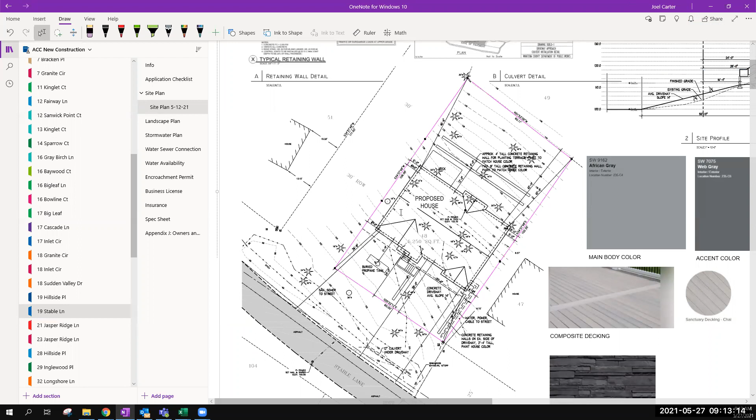One of the bigger issues here is the driveway slope again, and I think there's a preemptive variance put in for the driveway. We have kind of the same issue here that we talked about with last week's 38 Valley Crest. The driveway was too steep initially, so we asked him to take it down, and now he's at 14%, which is the maximum slope.

At this point, last week we said he could go to 16% and add some steps, and that would be his variance. Since then, I took a look, and the 16% only gives him 1.5 feet. So I don't know.

Is this something that- with the current plan, though, we have, it's meeting the requirements, all right? Can we go forward with the current plan, or do we need to... I'm not into the preemptive variance thing. As far as I'm concerned, the plan does meet their requirements. We'll have to hold them to it if it does get built and if the driveway is steeper.

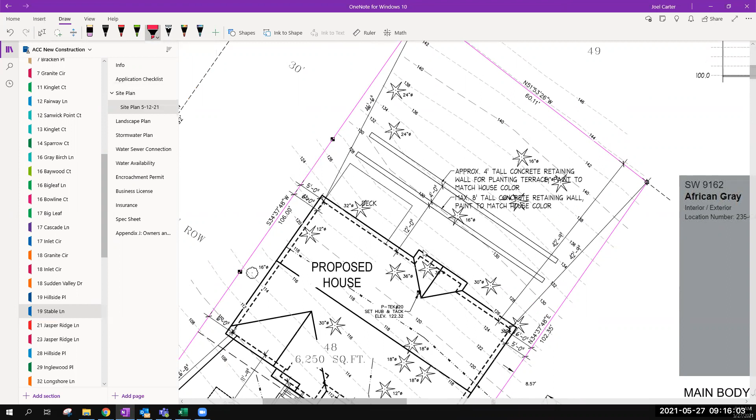And it would help out the foundation so that the right-hand corner is a little bit above. So I did the calculation: for a 17% slope, that would put the slab height at... sorry, wrong one. So it would put the slab height at 115.75, and the top of the wall in the back at 125.

The trees that are being proposed already to be removed are the 24-inch ones, these two here. And I was going to take the tree down but leave the stumps in so we don't disturb the trees behind it, so that when we start digging for the retaining wall... because the trees are leaning pretty bad towards the road.

So I was worried when I dig that out, it might fall over and then maybe cause the ones behind them to get disrupted. Yeah, those, I think, I agree, those should be removed, they're too close to the work. And I'll keep the stumps there so I don't have to dig a hole and possibly disturb the 24-inch behind it, and the 16, and whatever, the 3 in the back, the very back.

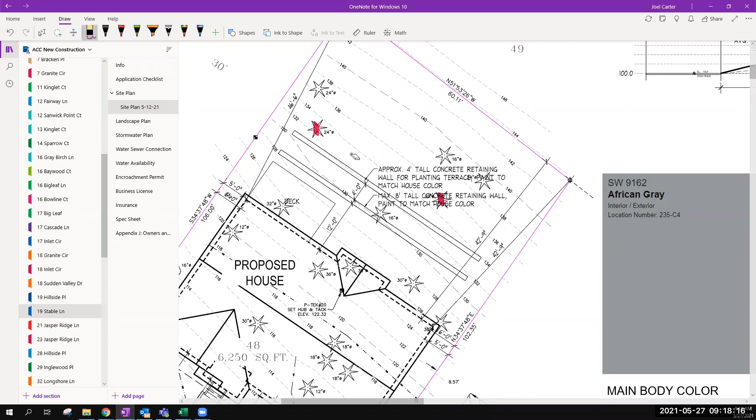Okay, so these trees in red are already proposed to be removed on the stormwater plan site. I don't see an issue there. That's with the current plan meeting all our requirements, all right? Is he proposing to change from the average 14% on the driveway to 17 then?

I requested 18, and I was hoping, because this lot is much steeper, and building that 4-foot retaining wall in the back, I don't know how we'd backfill it. I don't want to disturb the trees that are outside my property line. I'd have to get a big machine back there to backfill that 4-foot retaining wall, so I'd have to drive on the easement area on the left side, which is the Sudden Valley right-of-way, or on the other side, which is the neighbor's side. I don't think they would appreciate that.

Well, if you're just talking about backfill, you wouldn't need a big machine. A better type of retaining wall, if it's only 4 feet, is a block wall or a rockery, where you don't have to put in a whole footing. It's much less disturbing, but that 8 to 10 foot retaining wall there would have to get poured.

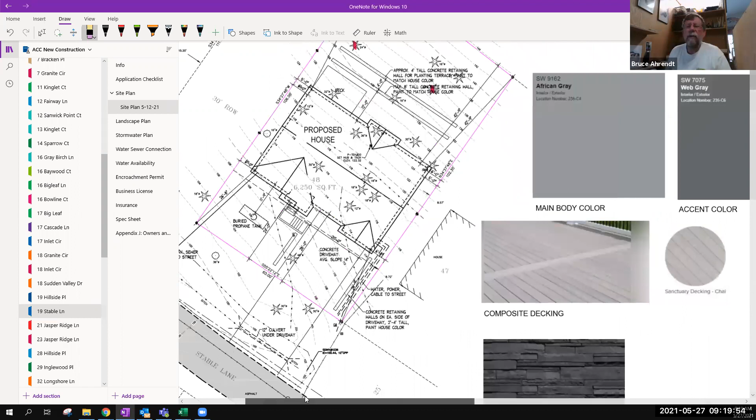Okay, I'm having a little trouble following what we're doing. We've got a set of plans right now that's being presented that meets our requirements, and now we're discussing changing it to something that doesn't. Well, the architect didn't have time to change it, and said after we decide on what the driveway slope will be, he'll correct all these comments Karen gave us, and he wasn't able to get it in before today's meeting.

So it's the same thing as last time for 38 Valley Crest Way. I requested a variance just in case we hit hard rock, and after looking at this more, I think we need a couple more degrees. Even though it doesn't give us more, it really helps us out in the back. And these retaining walls, there's so many of them, and once we pour the U-shaped retaining wall, we won't be able to get the machine back behind the house.

Well, I think you'd want to do the retaining wall while you're excavating for the house, so you can put your equipment in the footprint of the house to do the work behind it. It's the only way I see equipment working there, going from inside the house excavation and working that way. There's no way you're going to put equipment up on that slope above, and you don't have room for it on either side.

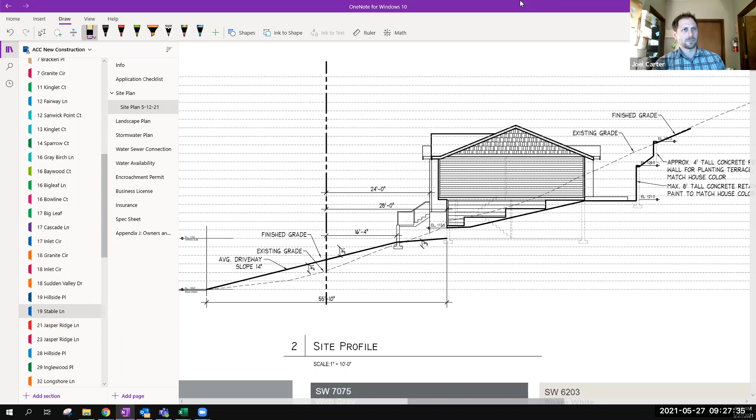Yeah, I can go with what's been submitted here, but if there are changes in the works that are going to increase that slope, we've already done this once. When do we say enough's enough?

Well, this is a variance form, right, that you guys provide? Your drawings have to match the rules. Variance is not an automatic request. The plan should come in and match the rules.

We got these notes like 2 days before the meeting. The architect's 3 weeks out, he didn't have time to change it. He said to figure out what the final slope is going to be and he'll send the final prints, since we've already gone back and forth so many times. And then I went to ask you yesterday.

So the current plans show the garage slab elevation at 114.5, is it? The garage slab is 112. Actually, you can go to 114, I thought, while meeting all the requirements. I did a calculation.

At 25%, 114.5 is what I calculated. Now, you don't need the drain swale at the bottom, which you're not showing anyway, if you just put a strip drain. So I think you can put the garage slab at 114.5 and still meet our 25% max.

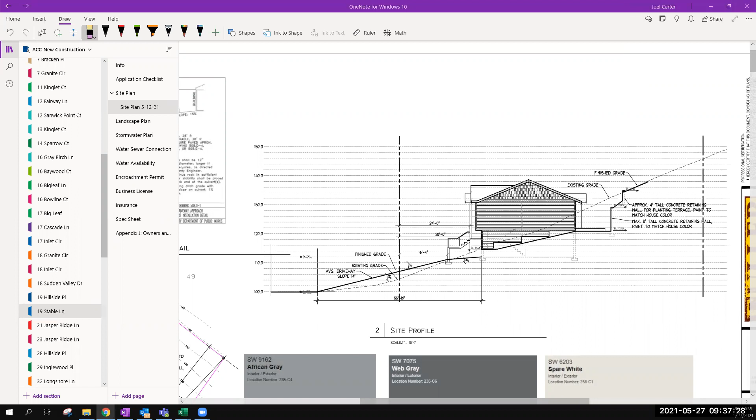You know, showing the stormwater again, the landscaping, the full schedule of proposed plantings, number and spacing of species. Part of that, I think, the landscaping plan comes from, part of it is designed by the stormwater, taking into account how much native planting and landscaping there will be. They do have species in the plant legend, but they need to show, for within the clearing limits, which plants where and how many, how far apart, especially for the sprinkle-throughout type plants like the ground covers.

They're only showing certain areas with landscaping, but the native plants have to be everywhere where they're digging up, within the clearing limits, except for the allowance the designer gives them, which I agree, those are ridiculously small, it seems to me, but that's what the designer says.

148 square feet of landscaping for this one. So everything else should be put back with native plants, I guess.

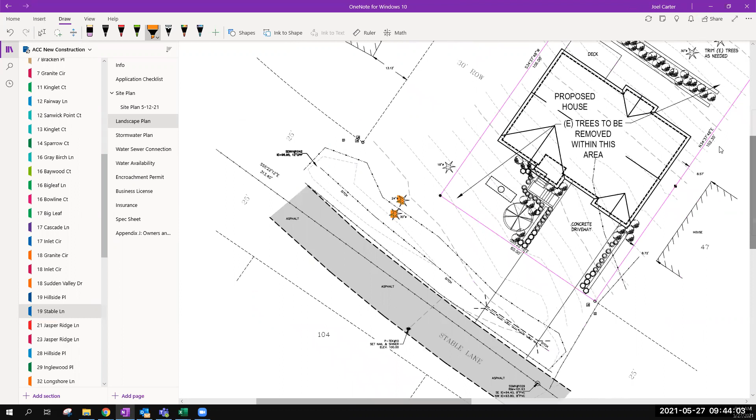Yeah, so these two trees here, I think, are going to need to be removed for our sewer connection. They were originally not on the stormwater, sorry, the tree canopy plan marked for removal.

So we went and rolled out where the estimated sewer T was, and it's right about somewhere in front of these trees. I've got a photo of it.

Yeah, so I think it's more to the left. I think you have these two trees.

I requested all four because I'll probably be in the drip line of all four, plus the temporary parking there. If you guys are concerned about roots suffocating, that's an alder right there, that 36-inch. They have a shallow root base, and they tend to fall the most, so I'd be really concerned about the alder there.

Yeah, you have to go to where the T is, they don't let you play otherwise. So I have no problem with those coming out. If you're going to take out two trees in a grouping, just as soon see them all come out.

The ditch looks like, on that picture, something that should play into creating a temporary parking spot. That looks like it shouldn't be a problem. Joel, your opinion? I don't think so, as long as it's cleaned up and revegetated. And we'll be inspecting for this.

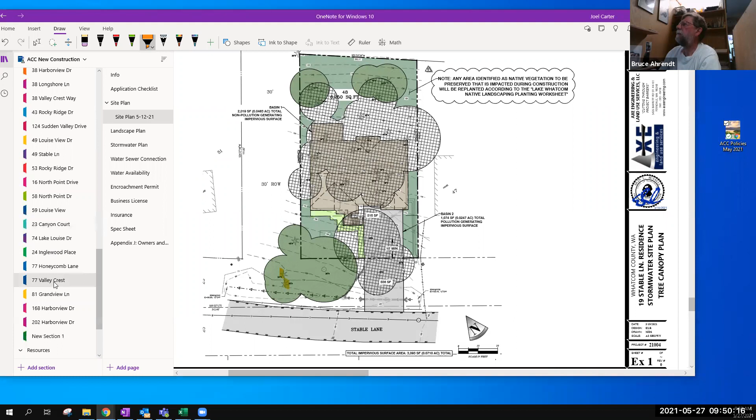We are looking at 77. So you want to start with 77 Valley Crest? Yeah, do 77 Valley Crest. So we're on a different builder here, this is Arrow Construction. Got a long home.

And I think it was, let me check. It was requested—do we have the builder and the architect here? It doesn't look like it. I don't see any other attendees in the meeting. I recommended they be here today, and the architect asked if they could join, and I said sure, it's publicly available. I can send them the link. It doesn't look like anyone's here right now.

I did send some comments last minute yesterday, and I got a chance to look at those. A lot of small issues on this one again, and when I sat down with the builder, it's a little frustrating to me that these builders are coming in with plans where they're not reading the ACC policies.

This house, as we go through the plans, there's several variances that were originally requested, but I think they've shifted the house a little bit to fit inside the setback lines. Let's take a look here. So our original plan set had an extension—we have a 20-foot setback on either side of the lot, the front and the side yard.

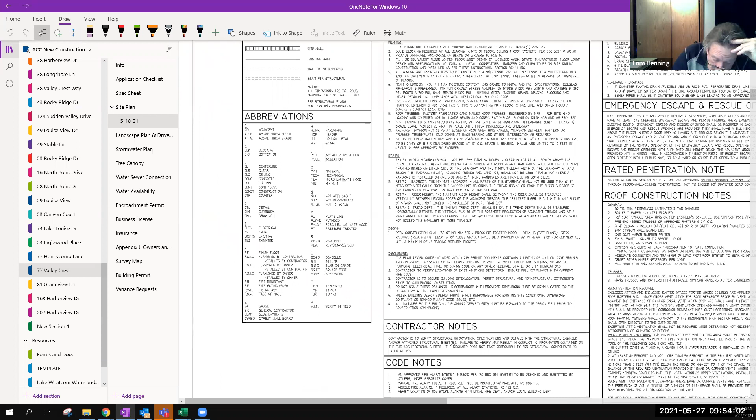So at that point he would have a 20-foot max, and I'm not sure what it says. Oh, so for the height requirement on this one, let's see. For the definition, we're within it—we're at 16 feet 7 inches. And where are you reading this? I've looked through his elevations and I don't see any place showing the height to finished grade. I know, and this is something I've asked them to put on future builds, to show that dimension on their plans. This is a measurement I put up on the drafting table, measuring with engineering rulers. I think this one actually did show it.

Can you go to the site profile, Joel? Where is that—the site profile? A1.1, sheet A1.1 at the top. Should be on all the elevations. There it is, they did put it in. Okay, yeah, it's there but it's not readable. You have to zoom in. Let me pop into this focus here—just a moment. There we go. There, oh that's better. Okay, 16.7. Mhm, that's better.

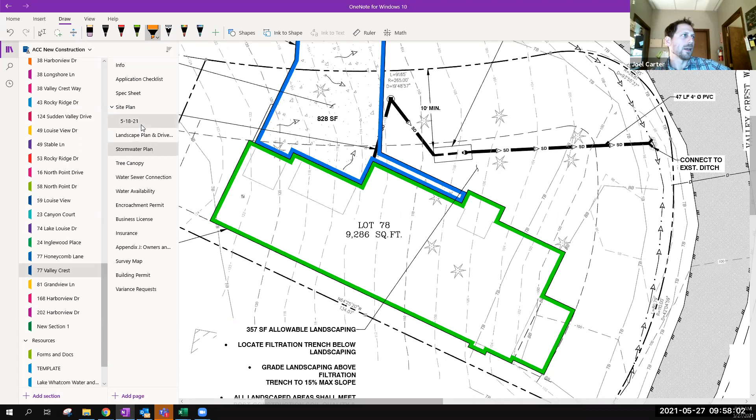Let me find... I wonder why they can't move this treatment system downhill. I don't know. But it should be out of the root zones of the trees that are remaining, because we have our new inspection schedule where we're going to put up the tree protection fencing, and then they're not allowed to do anything in that area.

Let's see, I'm pulling up comments, I want to address some of your comments now. So yeah, same comment about the landscaping plan. They really shouldn't need to show plants in areas they're not disturbing, but they do need to show them within the clearing limits. For this one, they didn't show the clearing limits in the front yard. The clearing limit line on the site plan just sort of ended in the middle of nowhere, and it should come all the way around the house and avoid those tree root zones.

I'm going to follow up with them and make sure they attempt to divert that stormwater to the north, because I don't think they have any of those trees proposed to be removed, but they're going to be cutting all the roots.

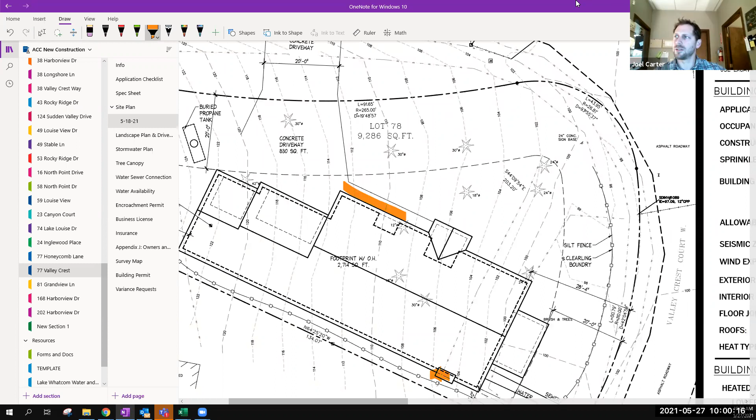Was that your comment about the sudden increase? Well, that's the comment about needing a retaining wall along the driveway, but also in their front elevation on sheet A3.0 — see that weird vertical line right here?

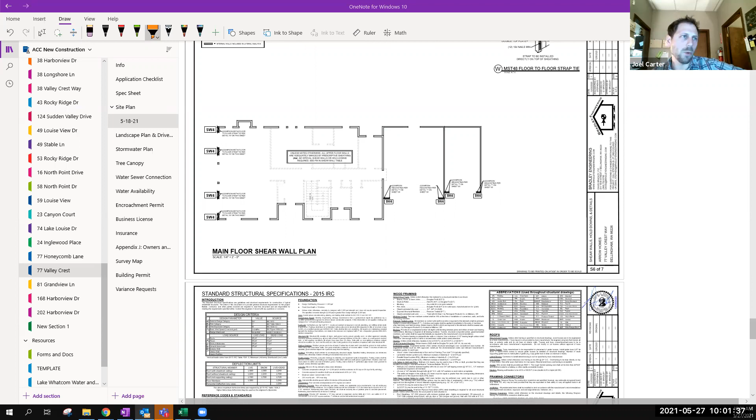Is there not a proposed retaining wall to go in there? They say not. Did the builder address that comment? Not yet, I don't think. Well, he said no retaining wall is planned, no sudden jump. Decorative wall supporting front walk and porch is what he said. So it sounds like—

I'm not sure he understood my question. That's my guess too. What's it show on the foundation plan? Is our foundation in here? Yeah, I guess there's no support, no foundations for the front walk shown there. There should be some posts or something. And the driveway slab is at—

Or our garage slab is at... 118. Well, our builder is still not here to answer these questions.

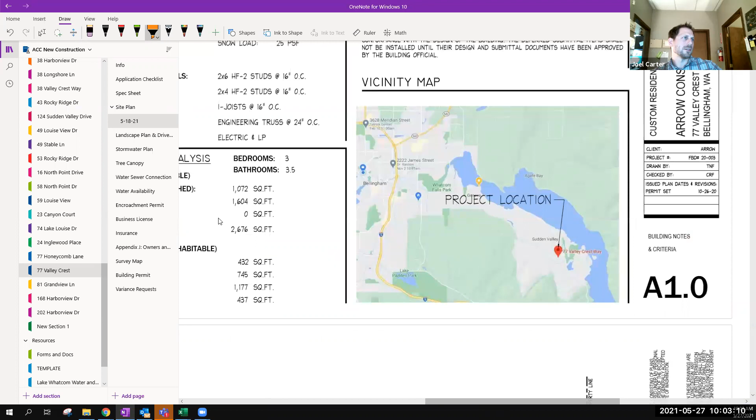Susie, are you here? She's muted. I'm sorry, what's up? Just as a general comment, went back to the application checklist — could we add another column for N/A? That way nothing gets unchecked, because we've got a couple line items here that there's no yes or no. But if we had an N/A saying it's not applicable, we need a way to know that everything's being looked at and been checked off, or not needed. Yeah, I see what you're saying.

Joel, what do you think about that? Yeah, on some of those, certainly — things like propane tank, some places have natural gas or they're all going electric. But we're kind of talking about a retaining wall under the house right now, and right now I don't know if they want to build a retaining wall or not, because they didn't check anything.

So it seems like it'd be pretty simple to add. Yeah, a lot of them hand write in 'not applicable' next to it. They could, but I don't think I've seen it yet. Yeah, last season we did. I see a lot of blank spaces.

If we do have concrete exposure, I talked to this builder and he'll do either exposed aggregate or cedar plank wood siding on it. So we did have that conversation. Okay, good. And that's something we'll be inspecting for as well.

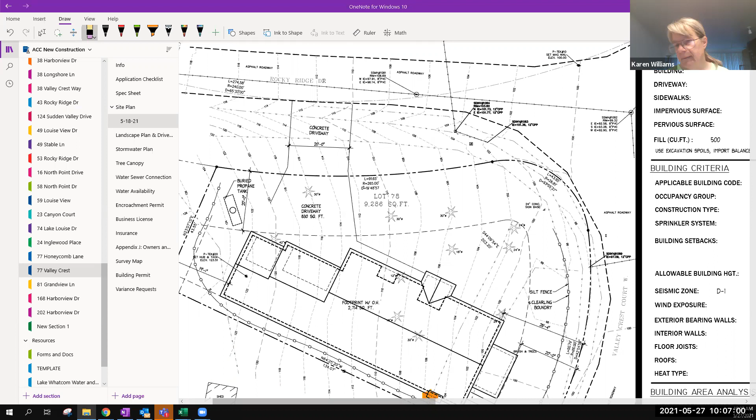Maybe he didn't do it for 77 Valley Crest. Oh, you know what, quite a few of them did. Actually, hang on, I think I might have it. No, I do have... I might have a newer version here, actually. Oh yeah, I do. Let me see if they're in here. Okay, this looks better.

So this just came in. Here we go - driveway radius, stormwater's on the site plan, strip drains in the garage, no retaining walls required, there's a propane tank. Wait, 118 at the garage and 10.

Wait, I think they might have their strip drain in the wrong place. Oh no, they can put a swale in - never mind, they've got the swale there, I'm sure. And the strip drain is probably actually a requirement of the stormwater guy. I don't know, we don't need one there because their garage is high compared to the road.

Other things - planting schedule and landscape plan, propane tank location.

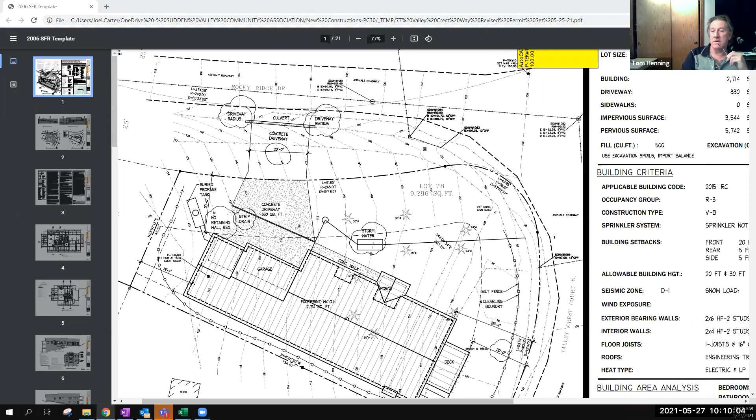One of the issues I'm having with the builders is they're turning in these application checklists with everything checked yes, of course. Then we go through the checklist together and highlight things and tell them, this is no, this is no. So they're not being forthcoming - they're not actually checking to make sure these things are on the site plan. That's a good point, Joel, and it's frustrating to me. We deny their application until they get it right. Yeah, I send it back with them for things to correct, and then they send me the corrected ones, and then I try to get it presented.

This was it, so we went through it together, and I'm highlighting these things. This is a no, this is a no. They didn't have actual setback dimensions to the eaves, or location of stormwater. These were things they all had checked yes, but originally during our meeting we sat down and they were no.

So you're doing their work for them. Yeah, it's like a student, a school kid who doesn't read the directions and turns in his report the day it's due and says they met all the requirements, and then I'm grading papers.

If your time was billable back to the client, that might help. Just like the attorney.

Well, I'm hoping that this process of responding to all kinds of comments is enough to teach them to clean up their act in future, and it won't be this difficult forever. I think it will get better.

As I've told them, the rules, we're not changing the rules. They're the same set of policies. Maybe minor changes have been made, but they've been available, right? They're there for you to read, and they're not reading them.

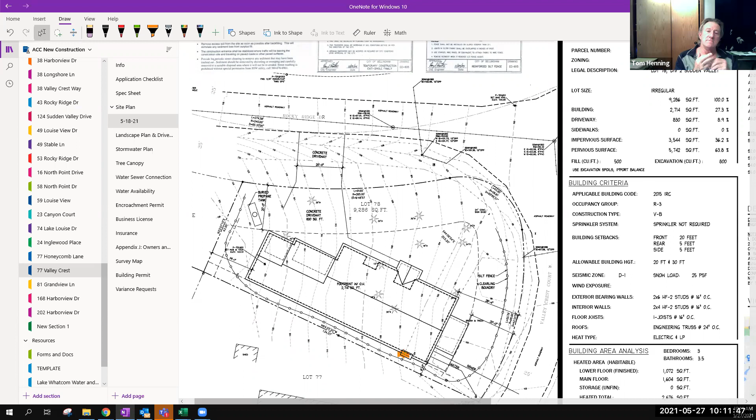I do think our website, when I moved here, was first looking at this place, one of the tabs across the top was governing documents. So it was really easy to find them all. Now they're kind of buried in the website.

Same thing, right, and it's part of their application. They agree that they've read and understand the policies and agree to follow them.

Well, anyway, I think we can go on to some other comments here, unless you... Sorry, do you have a question?

Let me go back to the plans. Any other questions or comments on this one right now? So I'd like to... these updated plans are in the Google Drive.

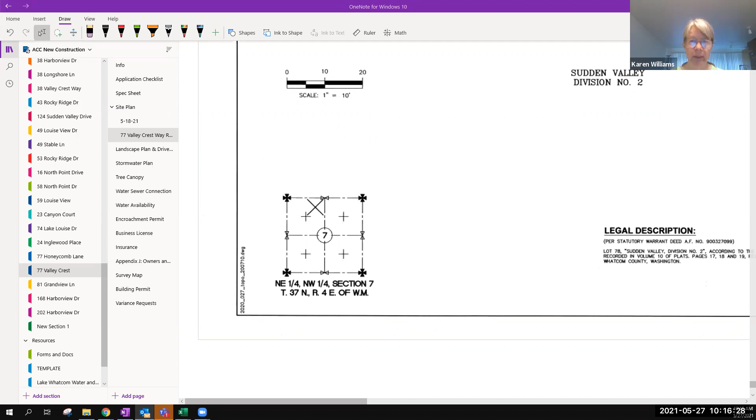On the application for new construction sheet, it definitely says, I have read and understand the Sudden Valley Community Association Architectural Control Guidelines. And on this particular one, there's no date on it. They turned it in, but they didn't date it. Yeah, so it's incomplete there.

Joel, did you say this was a new builder here in Sudden Valley? No, they've been building here for a long time. This is a multiple builder. It's a different builder from the previous one as well.

This was originally submitted 4/28. So to cover our butts, maybe we should... That does not mean it was complete on the 28th. That's the problem, right? So that date essentially means nothing.

It's a legal question to me, and I don't know that I would feel... Well, if it's a legal question, then you need to deny it for not having a complete application. That's what I think we should do. We should choose one of those three today. We could use the date that they submitted it for our review.

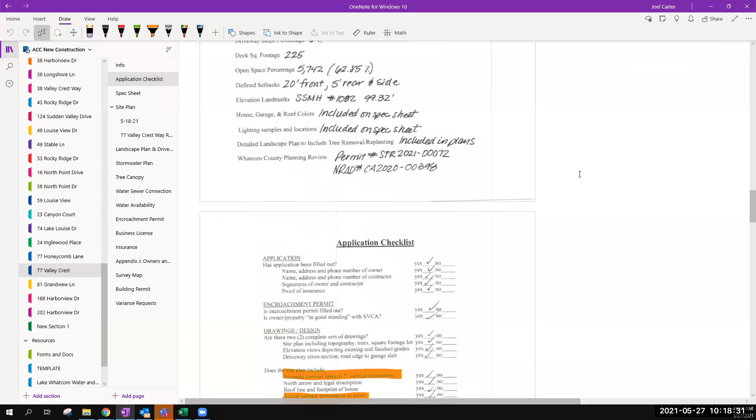No, that doesn't... so you mean like use today's meeting date? Well, no, because they actually were supposed to be reviewed last week. Sure, we had to put it off. But yeah, it's incomplete even now.

Yes, it is. So I think to cover our butts, we should use the earliest date and take one of those three steps within 30 days of that date, just to be sure they can't go proceed without us.

We should probably change that language. More importantly, we can't—is it in the restrictive covenants? Okay, so we maybe need to define what it means when they turn this in and when it is dated by us. Because if that is not on the same day that it is deemed complete, then that's a problem.

Because a lot of the times, I don't know if you guys know how it works, but they come by and just throw the application at the front desk girls, who then stamp it and process the check. And that's the problem—a lot of the times they're just super incomplete.

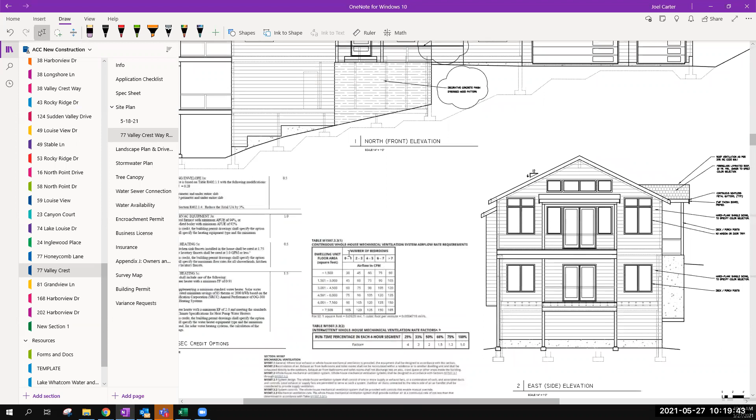But the safer process is for the committee to deny for incompleteness within 30 days of that day that they throw that stuff at the front office. I agree. If we have to do that, then they can't go ahead and say, ha ha, sue us. And then Sudden Valley would have to sue to stop them, which I don't think is a good situation.

So anyway, I don't think they would have a claim if it was not a complete application. How could they claim they had a complete packet in when they didn't? The problem is we would have to sue them, because what they would do is say, haha, it's deemed approved as submitted and we're going ahead and digging.

Yeah, I don't know. We would have to sue. It would be a very complicated situation for them. That's probably true, but still, like Karen says, we have to have a baseline.

Yeah, I agree. We need to figure out some way for a date when they're deemed complete, which this one technically would never have been. I would like this committee to take one of those three actions within 30 days of when they first throw this thing at the front office, regardless of how bad it is.

We can ask for more time. We can do any of those three things. But then if we do that, we have our butts covered. Okay, I'm worried about the paperwork side of this.

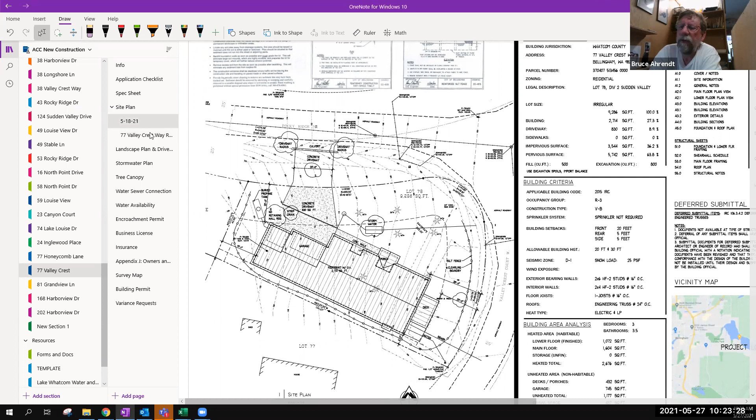If there's a question, I think Susie should go to the GM and let her determine and get a definition down so that it's in writing and everybody can refer to it. I can absolutely do that. That I would prefer to see than trying to do a bunch of denials and making people reapply and stuff.

And so where are we on this one? Do we have a list of things that are needed, and are any of them critical to where we couldn't approve it? As far as I can tell, we only have 1 variance at this point requested. A lot of the little things have been addressed here. I think the one question that remains, and it says the builder is saying there's no retaining wall required on that driveway, in this area right here.

But I think the builder, or actually, misunderstood. He was talking about the other side. I think I see what's going on here. Yeah, he's talking about the side where the propane tank is now, and I agree with him. There's probably no retaining wall needed there.

I think, well, actually, I don't know, because I think that something doesn't quite look right here with this grade going up and over. So would you be more comfortable punting and having him come back and have that addressed first before we approve, because we could probably fast track approval if that's the only thing we come back and check next time.

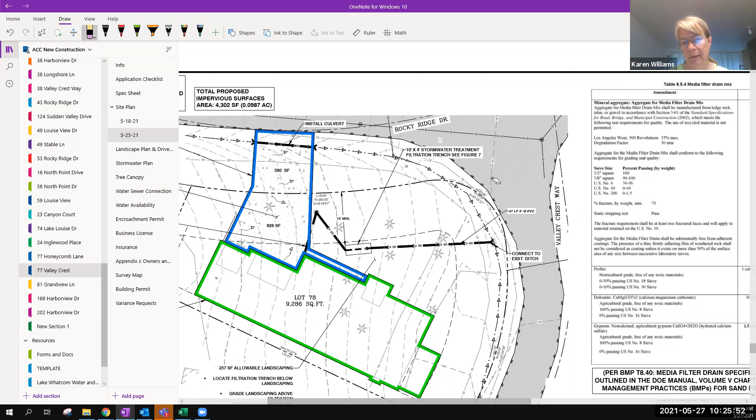Right. And the clearing limits finished out in a way that doesn't bother those trees. Yeah, and the landscape plan would be good. I think deferring might be. Didn't they have a... come back, complete set.

We won't- if they have it addressed by then, you want to do that? Do we reset the 30-day? I think their 30 day is if their plans are complete, their 30 days hasn't started yet, but we'll let Susie get a clarification on that and get it written down someplace.

Okay, that sounds good. I will do that. Yeah, I don't want to see him coming back at us saying, well, I turned him in on this date. Yeah, if we can just clarify a definition, I think we would be good on that.

So anybody want to move for deferral on this? I will. I'll make a motion to defer. Sure. We got a second? I'll second it too. Second, okay. Karen seconded. All in favor, say aye. Aye. Aye. Anybody opposed? Anybody abstaining? Okay, it's unanimous on deferral on this, and we can try to squeeze it into the next meeting if he wants to get everything addressed before then. Yeah, which will probably be 2 weeks from today.

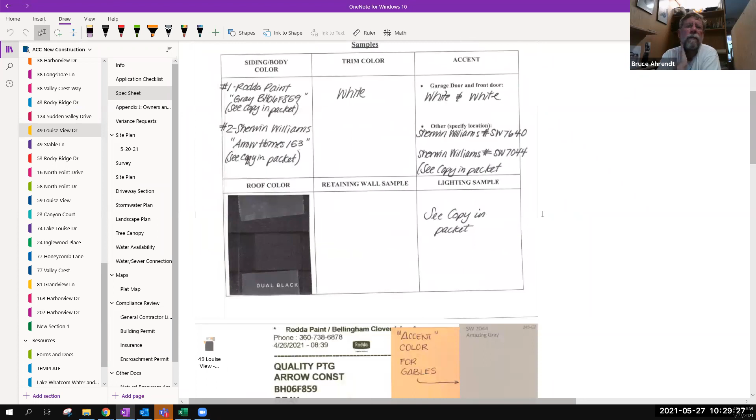And he's doing the same on all of these, I believe, so they fit our normal colors. At least he's telling us what's going where. Let me pull the file out for this one.

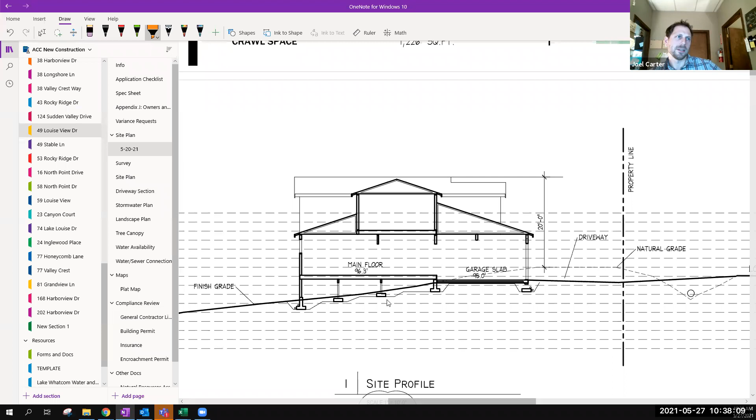Is it just - how does he define the finished grade? What's it going to end up at? Yeah, he needs to define it. In the case where the house is only at the minimum setback from the side property line, especially if it's minimum on all 3 sides, then the property line is the envelope. And if they're not meeting existing grade at the property line, their neighbor should have something to say about that - they're not supposed to be doing dirt work on the neighboring properties. So the existing and finished grade would generally be the same in that situation. But they should label it as finished grade and say where it is, so we know how they're defining it.

And Joel, you measured that to be 28 feet from the other side? I was wondering how you did that - 28 feet from definition 1. Yeah, let's see, this is another one I would have to check. I gotta start taking notes on how I measure everything here.

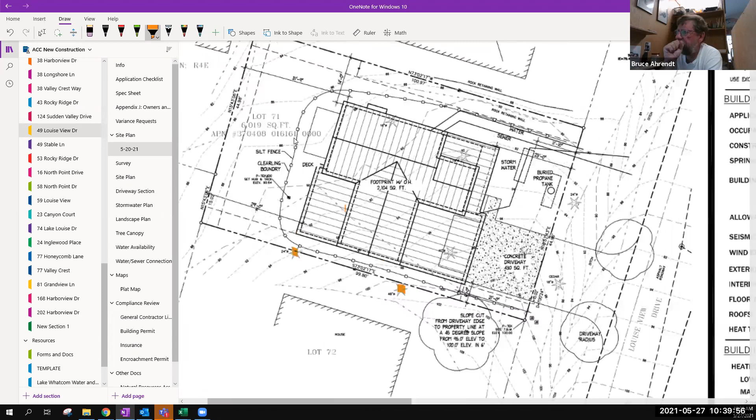Let's see, let's do a quick check. If we're 20 feet from the top of the structure to 98, and then we go down to our finish grade here, we're using 90. So then that's 8 more feet. So that's 28 feet. Does that make sense? Yeah, okay.

If we only have to use the lowest point of the finished grade envelope, then actually that's 92 feet or so at the corner of the property line, behind the house on the uphill hillside. The language is pretty clear - yeah, it's the lowest point 5 feet away from the structure.

So I think they're fine on that. You meet the definition under definition 1.

This is where I'd really like to see those numbers on the elevation sheet so we don't have to be guessing. I'd like to see the elevation of the topmost point on the house shown, so we can compare it to see if it makes sense. That's what I've been asking builders to do. I tell them I can measure it because I have the rulers and they're submitting the plans for me here, but when the ACC is reviewing it, you don't always have that luxury. I think in future plans you will see that.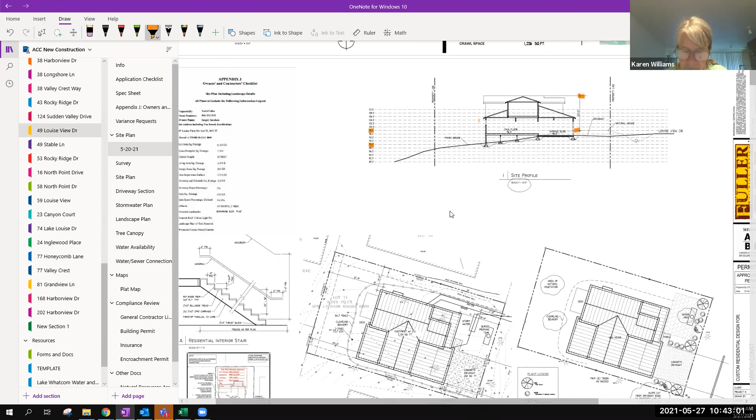It says 23 feet, 1 3/4 inches on that elevation he's looking at, but that's not saying where finished grade is. That's the height to the top of the piers. I'm just kind of assuming that black line at the bottom is his finished grade. Yeah, I don't think so. I think the intent of that dimension is to just show the building height from the garage floor level to roof level. I don't know, but it doesn't seem correct. It doesn't seem like it's really correct. It looks like it's going right at the garage elevation, doesn't it?

So that's why it's nice to know what the top elevation is supposed to be. Moving forward, I can have builders put on both front and rear elevations, both dimensions, marked to finished grade, that 5 feet out and 10 feet out, so it addresses what we're referring to and we know it meets the requirement.

Are we accepting, are we calling natural grade finished grade at the end of the day, or are we considering finished grade something like a driveway, sidewalk, or landscape? Well, they can be both. In other words, the natural grade can coincide with the finished grade if the contractor does not propose to change the ground line there. But it should be labeled as finished grade, because that means he's promising that's what's going to be there when he's done, whereas if he says natural grade, he's not promising not to change it. Well, if that's the case, I think he would be within meeting both.

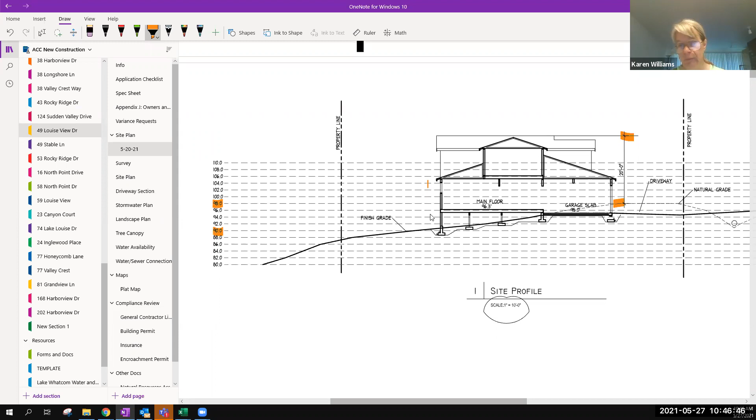But I think he needs a wall there. There's no, you know, to catch the edge of the driveway from the property line, it's at least a 1-to-1 slope, if not steeper. And if that's rock, that's okay, but if it's not, that's not going to be stable. Plus, you need some flat area to walk around your house, I think. So that 5 feet should be pretty flat, side to side. It shouldn't slope toward the house.

The driveway, the side slope from the property line to the edge of the driveway, around the uphill house, where it shows the 6 foot dimension there. So the property line in that area, the contours show somewhere around 102, a little bit lower, 101 point something probably. And the garage slab elevation was 95.

So somehow by magic, he has to get the soil to bridge that gap. And to my mind, a retaining wall is needed.

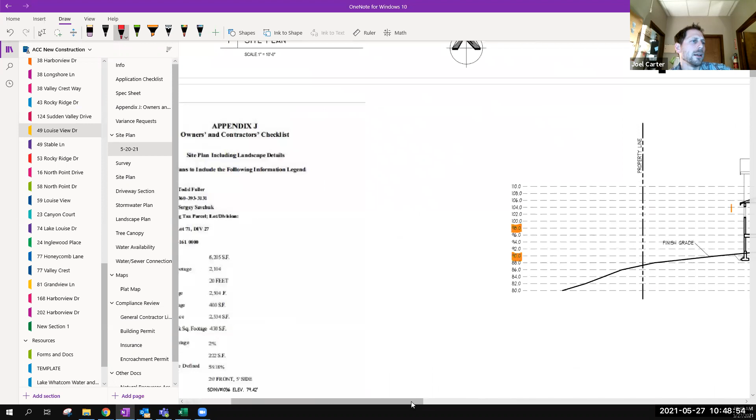And then if the driveway or garage slab is proposed to be, according to this, at 95. So then we have a difference of 6 feet.

Yeah, I see your concern. Well, do we want to ask them to propose a retaining wall for that area then? Yeah, I already asked for that in my comments yesterday. How did he reply? He hasn't yet. That was late yesterday. Okay.

Is that the only item on the sheet that we were concerned about? Other things that I had concerns in our initial meeting had mostly been addressed. There's little things like including the actual setback dimensions to the eaves. I don't know how, but I know it's in the policies, it needs to be on there. They've got 6 feet to the wall, and then we have a 1 foot eave projection. So we're in that 5 foot. So I've been asking

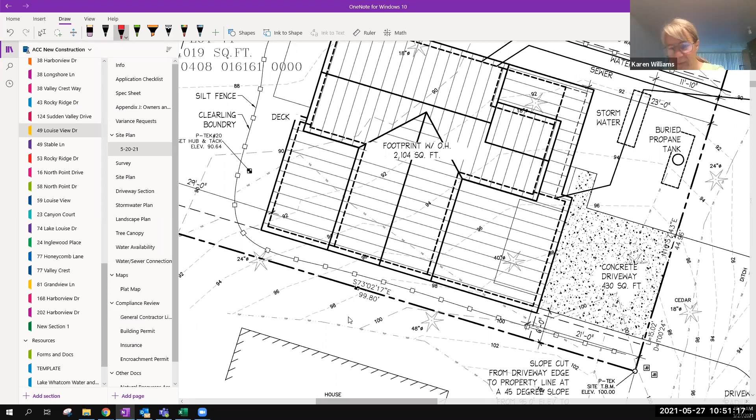typical, yeah. Otherwise, from these 5 proposals from this builder, I think this had the fewest items, and most of them have been addressed. So it seems like just maybe the retaining wall and those trees are the 2 concerns.

Is this, are they asking for the parking thing also? I did not get a response for that. I thought they would be here to talk about it in today's meeting.

Do we want to approve parking if they do it? If we do, they should remove the tree in the right of way there too. They can't do it without.

Anyway, but I don't really see where they would park unless they got permission from the neighbors. Yeah, there's not a lot of parking. That's why I parked in the neighbor's driveway.

So are these items that we feel we can address if we approve this now and move forward, that they need to come back in before start? Or is this something we need to defer to have them come back before?

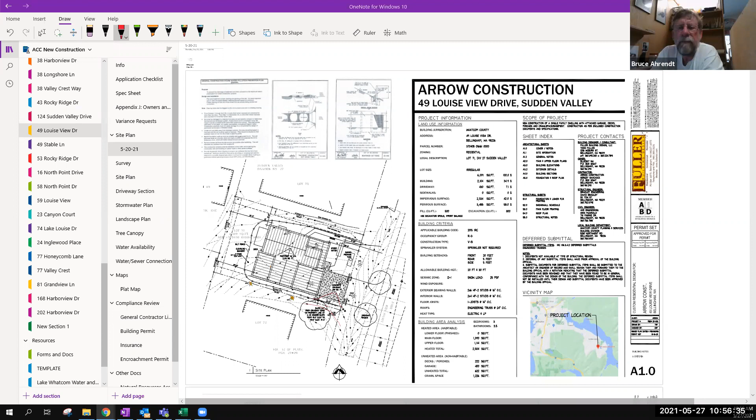So then I move to approve pending comments being addressed. And on the other hand, it should be quick if we see it again. It should be quick too, if they did address all the comments, it should be quick to approve them.

My issue with just approving is, when I've made comments, there's been multiple back and forths where they say they addressed the problem, but they didn't. So that's why I kind of like to see them come back.

It seems like it's the same designer for the whole batch, and they haven't either been understanding the comments or necessarily addressing them in a good way.

Oh, interesting. And just for the record, Keith, did we determine last week if Keith can make a motion or vote? Isn't he just a tiebreaker?

I don't have a problem, chair. I'm not chair today, but this came up in the last meeting. Yeah, I think I figured that I was ramrodding, I figured I had that right at this point.

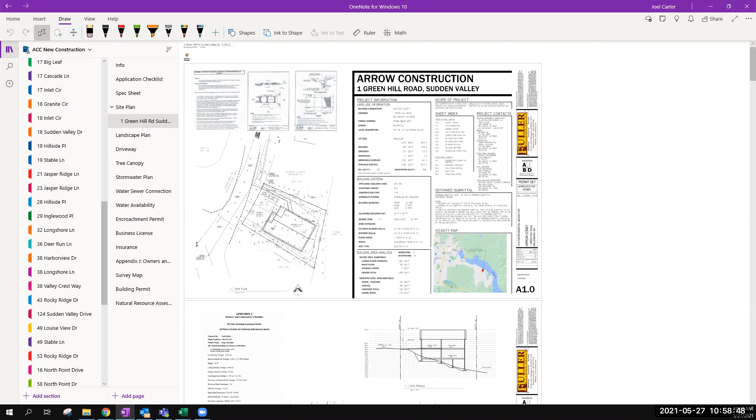There's also the landscaping plan that they have to come up with. I thought they've improved their landscaping plan on this one.

Well, it doesn't address the clearing limits. They're all doing the same thing, putting these plants at the front but not showing what happens within all the clearing limits.

And they all have these ridiculously small amounts of allowable non-native landscaping from the stormwater designer. This one's 161 square feet, so that means all the sides of the house have to be planted in ferns or something.

Well, this time they at least identify the area of natural vegetation and the clearing boundary, so as long as they come up with a list of what goes in there, and I think that's required from the county, that at least identifies what's going on and what we expect to see when they're done. So I was actually happy with their update, as long as they're identifying what's going in what area.

Yeah, they don't identify anything going on the left, right, or back sides of the house within the clearing limits. And they do show now on the tree canopy plan that their non-native landscaping is going smack over the stormwater thing in the front yard.

So that means right up to the house, they have to have native landscaping on all sides. Per the county, anyway, per the stormwater designer.

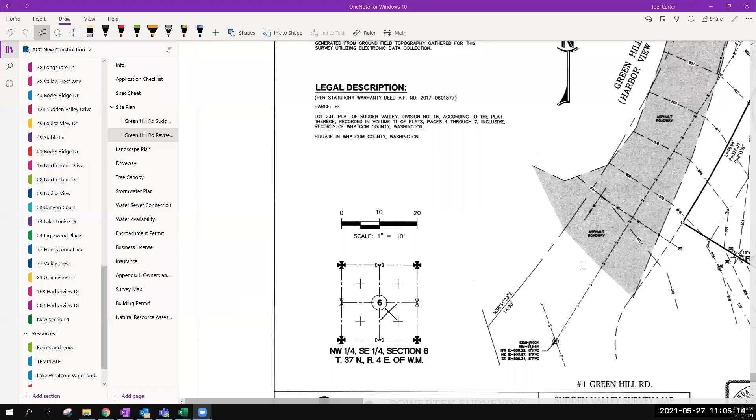So what we're looking at, this is the old checklist from John. Landscaping: is the plan complete, tree replanting, existing trees undamaged, trees on neighboring properties undamaged, all vegetative debris cleaned up and removed. Is there a survey markers restored or undamaged item in there?

Property corners exposed and in place, yes. That's something we definitely need to double check. So many of them were going out there now afterwards, and things have been covered up and lost.

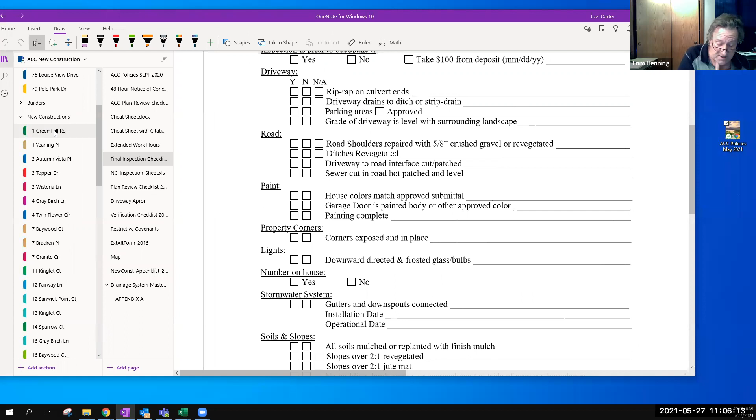And just as a personal note, not just to this guy but others, he's got a detail on his roof to wall connection which clearly shows the eaves. It'd be easy enough to dimension that from the wall to the outside edge of the eave.

So, sorry, are we on to One Green Hill now? No, that's the same property, it's just a general comment.

That's something I don't want to assume, that it's a 12-inch overhang or eave. Sure, I can double-check. Typically I'm really looking for those, and I'm measuring here on the plan set. If it was marked, it wouldn't need to be measured though. And it's in our policies, actual dimension to eaves, and I believe it's in the checklist too.

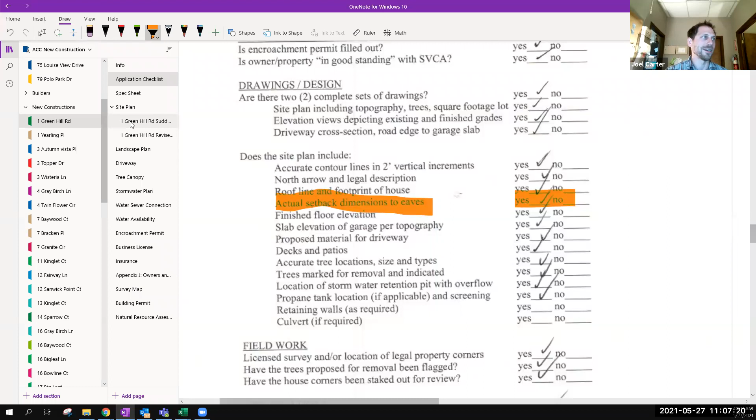Yes, right, actual setback to eave. Everything on the checklist on this one. It's right there, actual setback dimensions to eaves, and they're marking it, but it's not actually there on some of them. This is what I'm talking about.

It's an easy dimension to include. Typically they are good at putting in the dashed lines showing those setbacks, the 5 and the 20, but that's not an actual dimension. It's not marked.

So I think we're done here. We're ready for you to move on to One Green Hill. Okay, good. Same builder.

Now I had unfortunately a new concern on their stormwater system. I was looking at that and thinking, how is that going to work? The policy, the manual they're supposed to follow, the State Department of Ecology's Stormwater Design Manual, has some design criteria for these dispersion trenches.

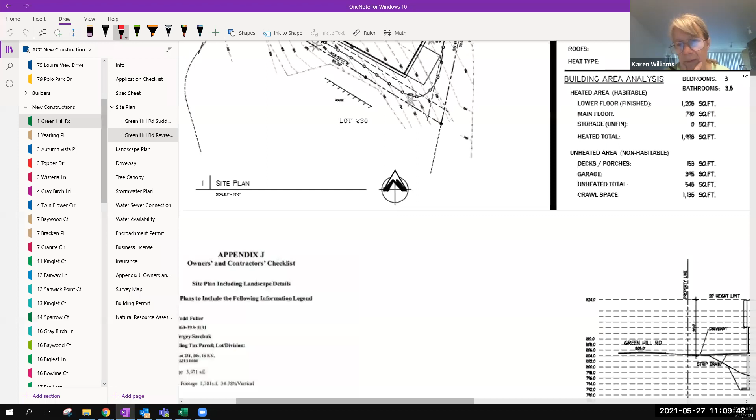Yeah, it depends on the time on this. So here's our stormwater — the actual trench is right up against the house. And whether they can grade the soil over to 15 degrees or 15%, I don't know that they can do that there. But, you know, it's up at the corner of the house, and then they have a dispersion trench on the stormwater designer's sheet.

That's only 4.5 feet long, and those are typically about 2 feet wide and 2 feet deep, or 18 inches deep. Then all the stormwater from the roof and the driveway is supposed to go down the hill from that. Ecology says there should be 10 feet of length for every 700 square feet drained. They have about 3 times that, maybe 2,000 square feet, I think — definitely at least more than twice — and only 4.5 feet.

The other requirements are 5 feet minimum from any structures and at least 50 feet filtration through vegetation before it hits any slope greater than 15%, or degrees, I forget which. But this slope is steeper.

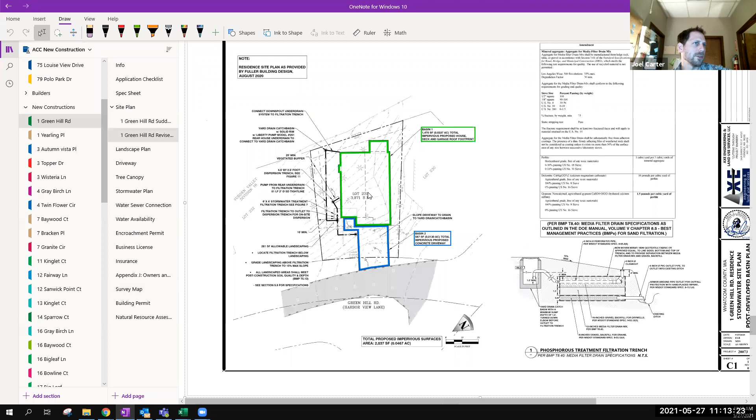I think originally there was not a survey; we do have a survey now. The driveway — do they put a strip drain in front of the driveway? Looks like they did.

Landscaping again, the full schedule of proposed plantings. Trees along the northern property line — let's take a look here. So I think the trees proposed to be removed — do I have that on the landscaping plan here?

Yeah, their landscape plan on sheet A1.1 doesn't match what's shown on the tree canopy plan, sheet EX1. Oh, there's the tree canopy. They're showing their non-native landscaping as a border around the side of the house on the tree canopy plan.

But on the landscaping plan in front, I guess nothing is shown. Actually, in their latest version, I think they did show something, but I don't have that printed out.

This tree on the left side, this 24-inch one, if that's going to be close to where they're trenching, that might be an issue — might need to be proposed for removal. I asked them to either change that. Also, the 3 trees on the other side, I think they can't keep those.

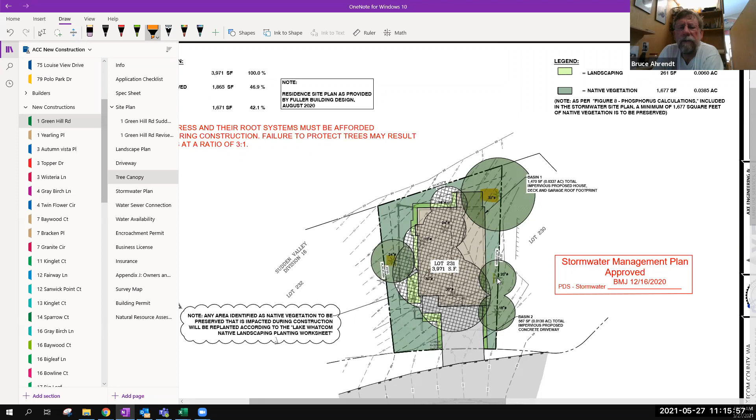It's not what we prefer, of course, but I don't see how they can keep that huge 30-inch tree in the back there, showing their clearing limits. I was concerned about the ones on the side there too, they look like they're gonna be too close to the house. They're a little smaller, but same thing. Their clearing limits are pretty much right at the property line, so they can't keep any of those trees, I don't think.

Do we know who those trees belong to? They look like they're right on the line, don't they? Yeah, the one in the back they own, that one's fine, and the 24-inch one they own. Although there's another one right off the property line, next to the 24-inch one. Right there, yes, there is. So, that's got to be protected.

What I would love to see is that they don't use this stormwater design. One option Wilson Engineering showed was a dispersion trench that would use Sudden Valley Common property. They would have to ask permission and get permission. But if that park down below is flatter and has the gentle slope that they need, then I think that's what they should do, is put it at the bottom and drain it out to the park.

I don't know if they could pump it to a ditch across the street or something, but the best choice would be to disperse it all along the back property line into the park, if the park can handle it. For me, a pump would be a last resort. Yeah, they're already showing a pump from the bottom, from the back of the house. Because what happens when a pump fails? It will, at some point, and that's when the homeowner daylights the gutters.

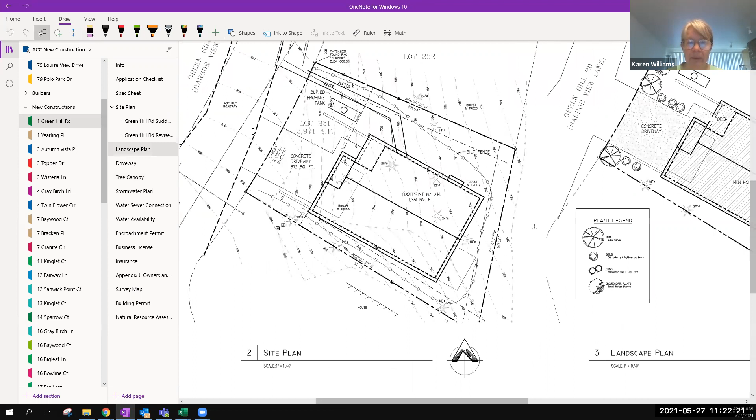Boy, the wind's picking up. I don't have any windows in my office, it's a cave. Well, I hear it.

Well, it sounds like the two big issues are the trees and the stormwater on this one then. Is that what we're hearing? Sounds like it, I think so. Remaining issues, yeah, I think it's fair to ask the question and just have them address it. Doesn't mean they have to change it. Okay, yeah, that's it. I think that sounds fair.

Once again, it'd be nice to see dimensions on their elevation drawings. Definitely. Right, the ground line labeled in a way that you can tell whether they're going to be able to meet existing grade at the clearing limits, for instance. Yeah, those ground elevations are something I've noticed are missing on these, and future builders have been mentioning it. I think it's in the policies that you're supposed to label them with actual elevations.

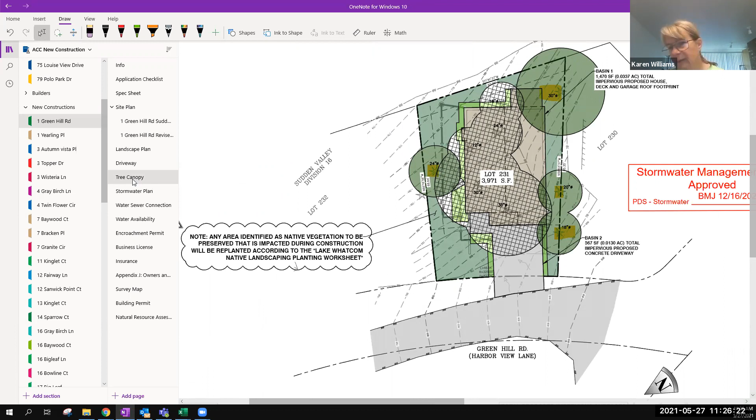I suppose the one thing I don't know about, since it seems like it's the stormwater designer who creates the tree canopy plan, is that removing more trees may affect their calculations in some way. So they should be asked whether, for all of these, additional tree removals will change their design in some way.

That's a good point. Yeah, here it is, this red stamp thing. All retained trees and their root systems must be protected, and then they say that on the same canopy plan that shows the overlap with the house foundation. They're two conflicting statements. Other than misspelling trees, they say they would have to replant at a ratio of 3 to 1. So when I look at a statement like this from a home inspector, it's a CYA, cover your ass kind of statement. It says, hey, I said protect the trees on there, you went and damaged the trees, I'm not liable. That's how I view those statements. So whether or not, even if they're a foot away from where the trees are from the foundation where they're going to be digging, they would still put it on there, even though there's no practical way probably to protect the roots.

I think I'd feel more comfortable with them being removed and having them replant some trees and try to maintain those, but maybe I'll just follow up separately, because the stormwater designer creates this sheet, and it may funnel into their design calculations in some way. So if we're changing this, they may need to change their other sheet in some way. I think you're going to get more direct rainfall with the canopy removed. That's a question I could call and talk to the engineer about, and see if canopy is something they take into consideration. That would be nice.

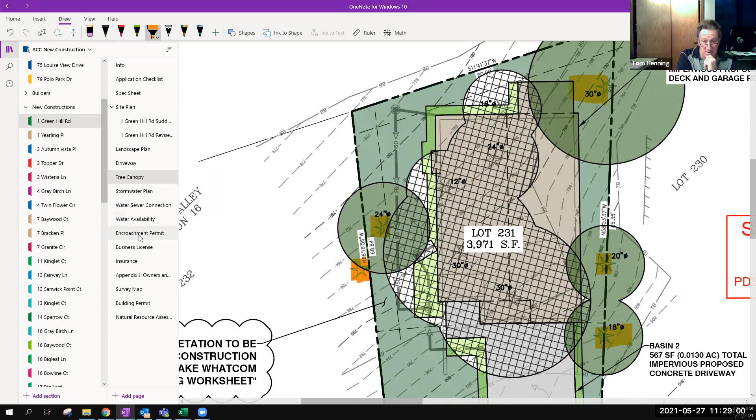Well, I don't know how big the canopy is on the neighboring property to the left, around that 24 inch tree. Yeah, that one's another 24 inch dimensioned on the plans. I think so, yeah, so that's going to have a pretty extensive root system. Yeah, it is.

So if they can keep all their work really close to the house, maybe those trees could be saved. Maybe not, I don't know. Definitely the ones on the other side should go.

Our stormwater inspection - so when they call for the stormwater inspection, they're supposed to have everything excavated, ready to fill the stormwater system in, and that's when I'm supposed to go out and take a look at it. So I'll be inspecting for tree root damage along any trenches like that. Oh, okay, that's good, yeah.

But with their clearing limits where they are, they're going to have to relocate that because we're going to put our tree fencing in, insist on their tree fencing. And they're showing that right next to one tree and not far from the other, so yeah, they should address that somehow.

Either move the silt fence and the clearing limits closer to the house, or show those trees coming out, removed, perhaps subject to permission from the owner. I don't know, if they go over the line, maybe - because that one tree is clearly not theirs. And then there's two that seem to be right on the line on the other side.

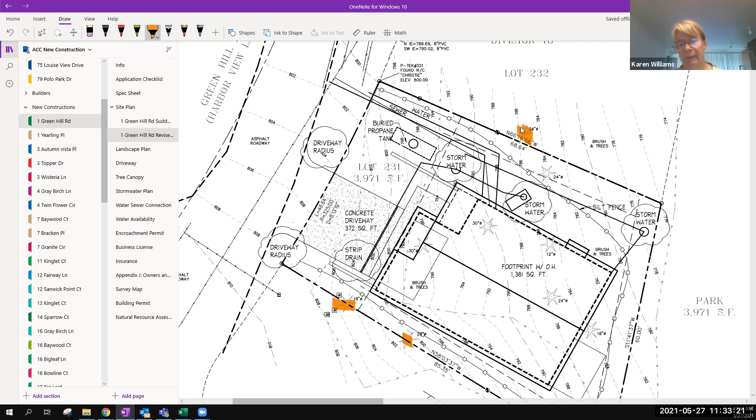So do I have any motions for approval on this one? And they should approve - got a second? Approve with, if they address comments, including - yeah, my bad, I should have included that - filling in the landscaping around the sides, identifying what's supposed to go in everywhere within the clearing limits.

You up with that, Joel? Yeah, so I've got identify proposed landscaping, approve with comments, the trees. And then I think there was also, you wanted to address the question of the stormwater placement. Yeah, I'm not sure how much authority we have on that, if they have an engineer stamp signing off on that, but it wouldn't hurt to just bring up the question.

Yeah, I agree. We're not asking them to move it, we're just asking for clarification, right? Yeah, especially if those trees have to come out.

So let's have a vote. All approved with comments? Aye. Okay, that's everybody, unanimous. Anybody opposed? Anybody abstaining? Okay, it's passed with the comments, and Joel's got those.

Okay, Tom made the motion, or who made the motion? No, I made a motion. I think it was Tom, yeah. Tom and Karen, right? Yes, Tom and Karen. Okay.

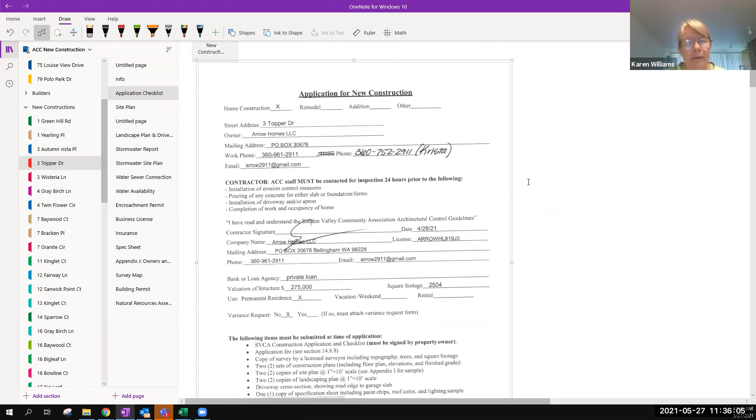Arrow Homes LLC. Yeah, I think that is filled in - it appears to be filled in on mine, unless I'm misunderstanding your question. The owner is Arrow Homes LLC. Is that actually who's on the records as the owner? But I mean, that's who they say is the owner anyway. Well, they will be the owner until they sell it. Okay, yeah.

Oh, that might have been my bad on this one - I guess the signature is just in the wrong place. All right, just want to make sure I've got the most updated plan set here.

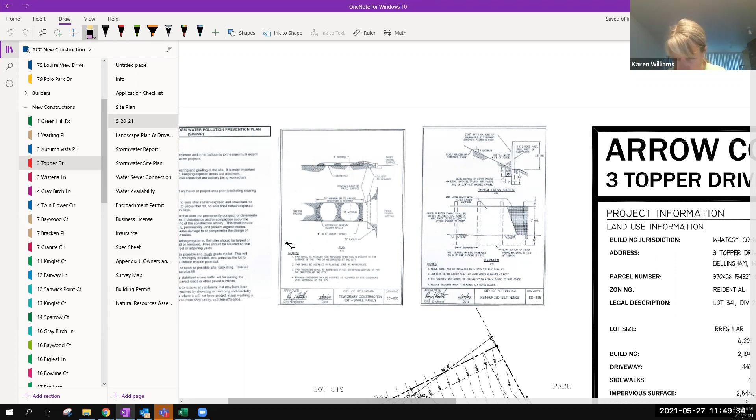On the same sheet, on the site profile, same comment - he's showing natural grade defining the 20-foot structure height. You should clarify that that's final grade, and give an indication of where in the building envelope that is, because the 20 feet should be from final grade, and he needs to show how he's defining it.

That won't be on the driveway, it should be off to the side. That's how I had it measured - 20 feet to that natural grade. On the downhill side, they're at 46 feet, so having to meet that natural grade is the only way they can meet that height limit, and they're right at 20.

I think they need to follow the definition in the appendix. So is it just a matter of labeling that natural grade as final grade? Yeah, I think so. As long as they're one and the same.

That's 10 feet away from the structure they're allowed to go. So if they go 10 feet towards the neighbor there, that should be at the right height for the 20-foot to be a reality. And if that's too steep to get down to the driveway, once again I think they need a retaining wall or something.

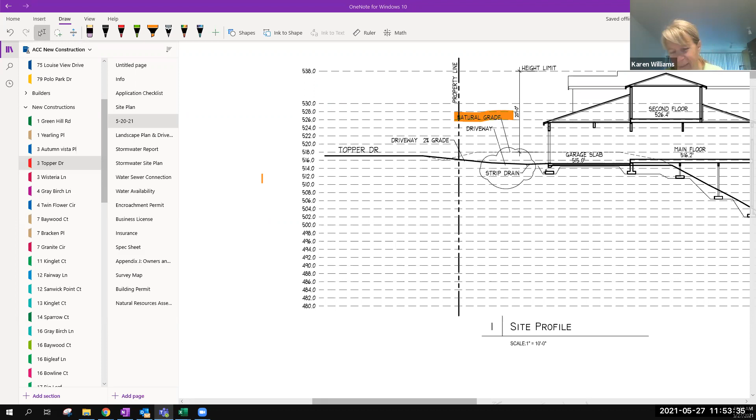Starting from the home corner and either paralleling the driveway or doglegging over a few feet before they parallel the driveway again - as much as 10 feet, but not more than 10 feet, because then they won't meet the height limit maybe.

On the back corners of the house, he's got his setbacks to the exterior wall. And on mine, I can't read the dimensions. So this top one up here is 6 foot 3 inches, and this bottom one down here is 7 foot 7 inches. And then you can see, he's got this.

This is something else I've been asking him to do - actual dimensions of eaves, and that's in my notes.

If we look at our setback line, that's the dashed line drawn on these plans, we're within it on both sides. We're at the 5 foot on the left side. I see what you're saying, right on the corner. Looks like he's in - it's right there.

Technically, he's got - if it's a 12-inch eave, he's got 3 inches.

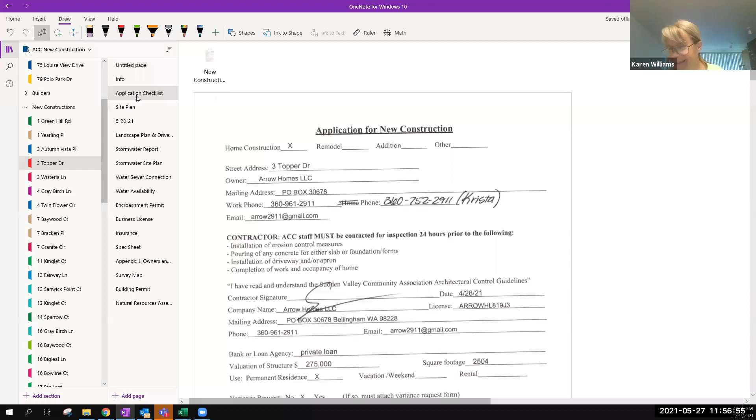One thing, I noticed their checklist did not have good standing checked. They were unsure and they made a phone call, and Susie confirmed it - they are in good standing. They can honestly check that box. That was a question that came in, and I think I have an email written confirmation from Susie. If they're not in good standing, what happens? They have to be in good standing, or else they don't get approved.

I see a tree issue in the back. There's the one tree they have back there - they're showing their clearing limits really close, this 12-inch one here. They can pull their clearing limits closer to the house.

Deck foundations typically are just poles, just piers - here, concrete piers. Yeah, this is just a deck back here. Yeah, I thought I saw that. Well, it's hard to say.

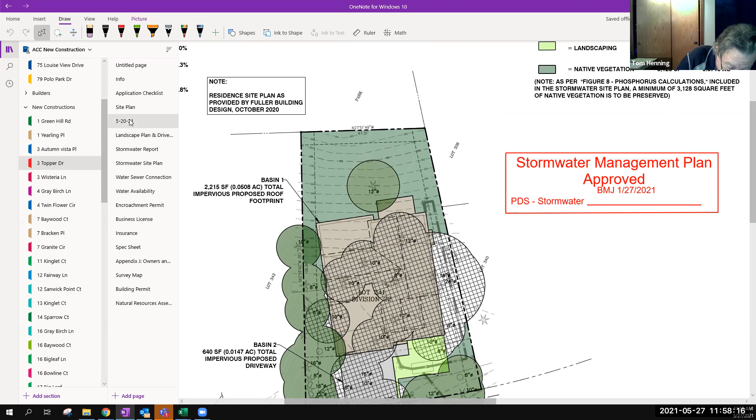I would say that's part of the house. Oh, the deck? Yeah, we consider it part of the structure.

Yeah, they've got 2 posts there. So they won't be disturbing the soil for that all that much, necessarily. I wouldn't think so - just some post-hole digging.

So maybe they could pull their clearing limits further away from that tree. I think we can make a general comment that trees that are to remain, they need to do their best to avoid the roots. And we'll be checking for that tree fencing too around that back tree - that will define some of their clearing limit.

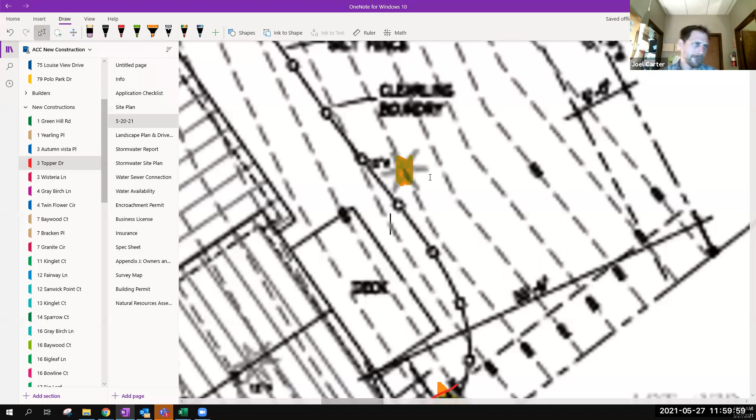Those are pretty good sized footings on the deck. You got 24 by 24 on the sonotube detail. But they're not at the corners, right? They're inside a little bit. It shows them pretty much right at the corners.

Yeah, I don't have the foundation plan in front of me. Oh, I just had it up here. Sorry, no worries. Yeah, it's kind of shown on the sonotube detail, number D. It's a pretty good sized footprint, 10 inches deep. Not that bad though. Yeah, they are right at the corners, aren't they?

They should be able to pull them back, but it's only 10 inches deep. I can't see that damaging roots. Yeah, it'll only damage a little bit of root zone, not much. That's cool. They should still be able to protect it - it's not that large of a tree. Yeah, I don't see a problem there.

Okay, are there other issues? So what do we got? Remove the 5 trees at the left. Retaining wall along left side of driveway, including showing us what it'll look like.

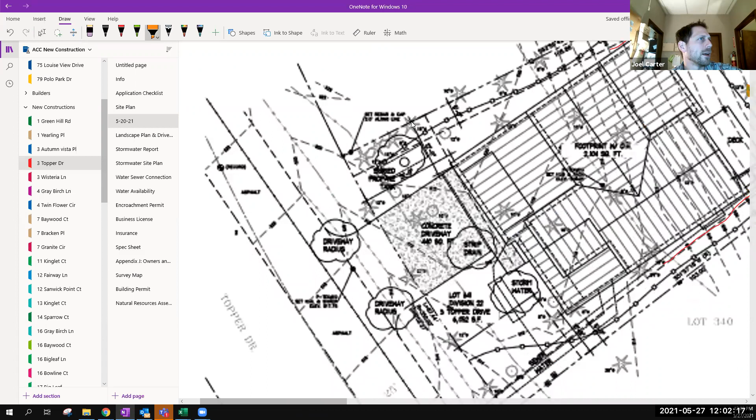We can give them the option maybe to move the propane tank back over, but I still think a couple of those trees were a little bigger and the home excavation might be too much for them. I don't know.

I forgot, now the biggest one is maybe 16 inches? Yeah, well it was an 18-inch one. 18 inch, okay, pretty good sized tree. 18, 16, 12. So I really think we just tell them, even if they do move the propane tank, they probably should just get rid of that bunch.

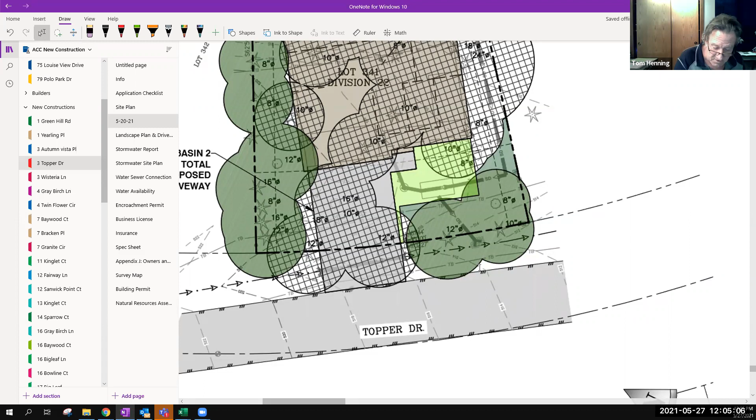That looks like it could be fairly close to Schofield Park. Karen, you live in that neighborhood, right? Wait, no, this is not in gate 1. Oh, it's not? This is Topper Drive, up high on the hill, isn't it? I thought so, yeah.

So, yeah, I guess if they want to park, then they'll have to remove those trees. And if they don't want to park, they might not have to, especially if they show their stormwater draining maybe next to the driveway instead of in the middle.

That pipe that catches the ditch - whether that can work or not, there's a little bit of elevation difference in the ditch. If they relocate that, it might not work, I don't know, because it goes uphill if they relocate it in that direction. So that's the question, do we think the stormwater pipe is enough to remove those trees or not?

And are there other utilities there? There are - sewer and water are shown also right next to those. And is that where the sewer has to come from? Was I provided the water sewer connection map on this one? I don't know. I think maybe we should just note that if they're damaged during the digging, which Joel will inspect, they need to come out at that point.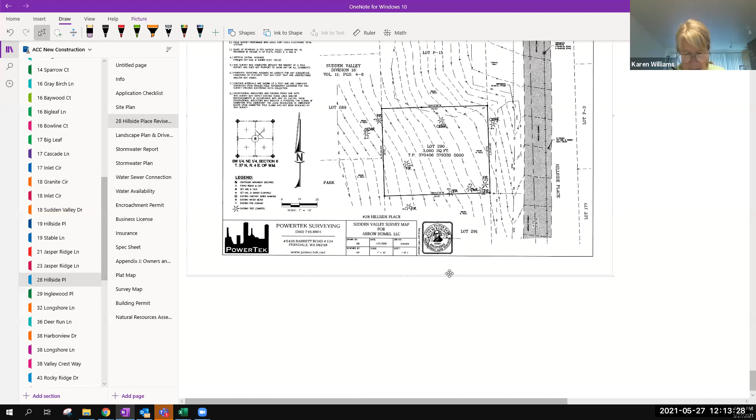Here we go. Yeah, I used their garage slab elevation and our profile, our driveway shape. And for that garage slab elevation to work, they need 33%.

Yeah, they're showing 22 right there. So I remember this conversation - we talked about this because there was no 22-degree slope indicated on there. Now there is. However...

I know that. So here's their old one - looks like 25%, right? We can compare these. Here's their original site plan that was submitted, and here is their updated one that claims a slope of 22 degrees.

So we're at about, let's see, benchmark 106 at the property corner. That's what they say, and then we get up to about 114, about 115. And then on their old one, they're still at about 114 - oh no, sorry, 106 at the property corner. And they're at about, maybe they're right, 113.

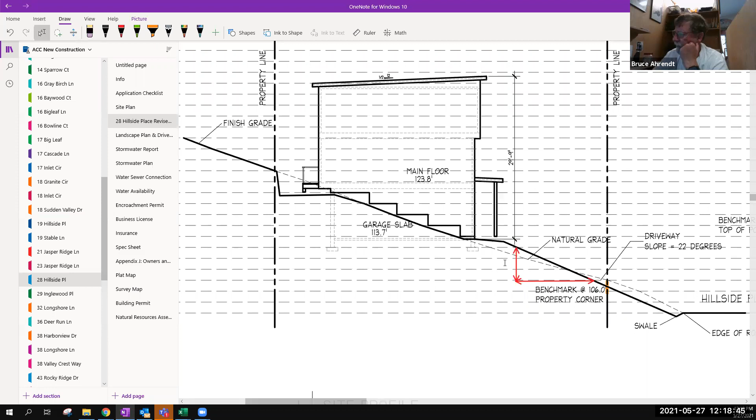22% is below our requirement, but 22 degrees, I'm not sure what that works out to in percent. Yeah, 22 degrees is 40%. Oh my goodness. So run it through the calculator - that's what I came up with in measuring the plans. We got about 6 feet of rise over 15 feet of run.

Yeah, that doesn't work. 40%, that's not even close to our guidelines on that. I don't know how we... why would you propose something like that? It's not our job to redo this thing if it doesn't fit, it's their problem to fix. I agree.

What frustrates me is that they've submitted the exact same driveway and just put a label on there that says 22 degrees, and it's not accurate. Well, wait, 22 degrees might be accurate. 40%? Oh, is that what they say? If it's 22 degrees, that's 40%. Okay, so it is. Sorry, I'm getting lost here.

25% is the requirement, which is 14 degrees. No, you're right, it's way over. Their garage slab elevation suggests only 33%, which is better than 40%, but still quite a bit different from 25. So it is accurate. Okay, correct, but not really good. And there's no variance submitted for this, so...

So if I wasn't running this meeting, I'd move to deny at this point. I would move to deny right now. Okay, second. Anybody want to second that?

Are we done discussing everything else that may be wrong? Other notes? Let's make sure we give them a good checklist, oh, trees that they should remove. I don't know how they can fix that, but if they can fix that, I'll second it. They do have trees that they should remove. Okay, same thing as probably last - should make a total list on this.

There's again 4 of them on the left side there next to the driveway. I don't see how they can keep any of those, that cluster. Yeah, these guys here.

We talked about this tree, this 36-inch one, and how that sewer line is going through it, and we proposed to move it closer to the edge of the lot or near the driveway.

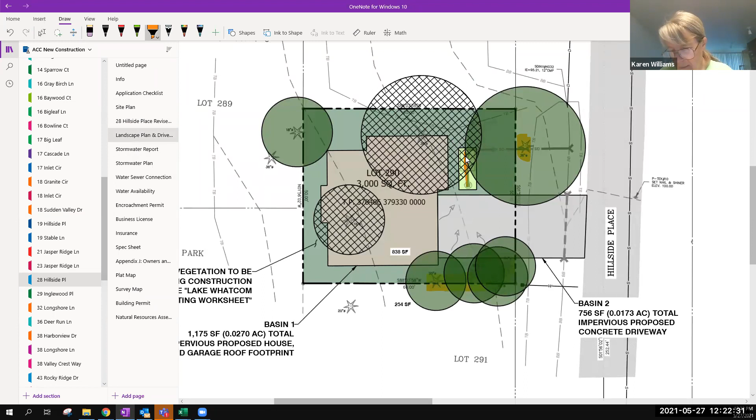Isn't that a sewer line going right down there by the tree? They got it labeled sewer, going right through the middle of the tree. Oh, that's storm sewer - this is our stormwater here. Oh, okay, unless you're looking at somewhere else.

I was looking at the site plan, and they got a heavy line going right through there and it's labeled sewer. I could confirm that location with Lake Whatcom.

Sometimes the planners, whoever's drawing this up, they're not given that information, so they're just drawing a line on here arbitrary to show it somewhere. But yeah, I could try to confirm that location. I see that, it's almost the same parallel to the stormwater, and the power and cable are on that side right now too, but closer to the lot line.

Those could be relocated if necessary, right? Yeah, Lake Whatcom Water Sewer District is really good at providing us with the maps. So that's the thing - if the sewer is on that side, then that tree can't be kept either. And actually, I think it can't be kept either because it's too big, right? I mean, even when they're digging their stormwater trench and their propane tank, that'll be kind of close.

So on this one, they've updated the propane tanks to be in the back, the vertical back side of the house. Oh, Jesus, I thought I had the latest - I didn't do that. Okay, well that's good. So if they don't trench anything, except maybe right next to the driveway, they could have to go down by the driveway, then they could maybe keep that tree.

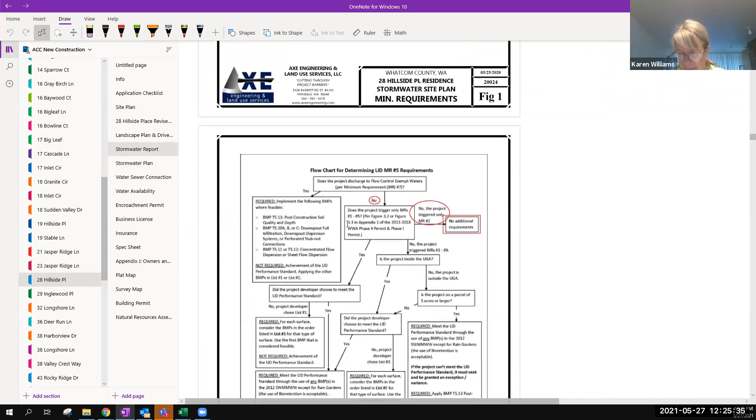Generally, is there what stormwater looks like? Yeah, 4 feet deep looks like the minimum. Well, plus. It's going in a pretty flat area. So it'll be 1 foot minimum and 1 foot 6 inch or something like that maximum probably. If they put it diagonal, it'll be perfectly flat from one end to the other, but anyway.

Okay, so we have sewer reposition, stormwater reposition if possible, power cable, protect that 36-inch tree in the right of way. Proposed either replanting, reposition all of those next to driveway, or show that tree removed. Yeah, and the driveway slope is the killer for this one.

Yeah, and I don't see a fuse panel. I don't know where they're planning on coming in with their power. Yeah, it shows it as on the right side of the house. Power and cable, it's labeled in the site plan. I was looking on the interior walls. Yeah, mhm, site plan.

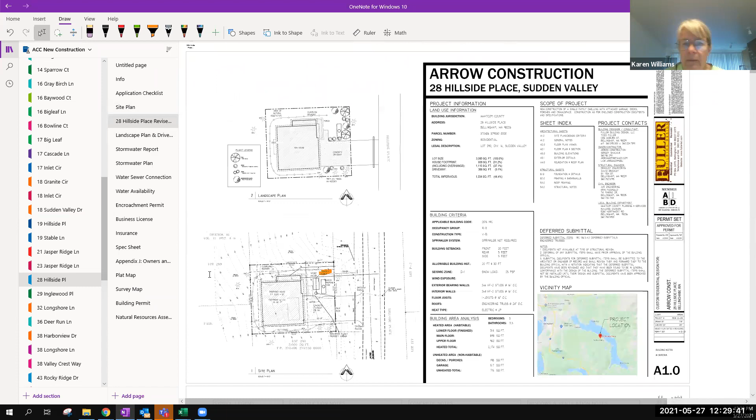The latest one is dated 5/24. Yeah, that's the one I got. My site plan's not showing that, it shows it in the front there, buried. When I'm looking at the clouded area that Joel shows on his drawing, I have 2 round propane tanks in there up against the house. So there must be something, or a different page.

It's not on the site plan. The site plan hasn't been updated then. Now here it is, let's go in. There, yeah, right there, that's it. Yeah, I've got them as vertical propane tanks on this one, on my screen. Is it this?

I thought I had the same sheet you had up, but my site plan is showing it buried in the front.

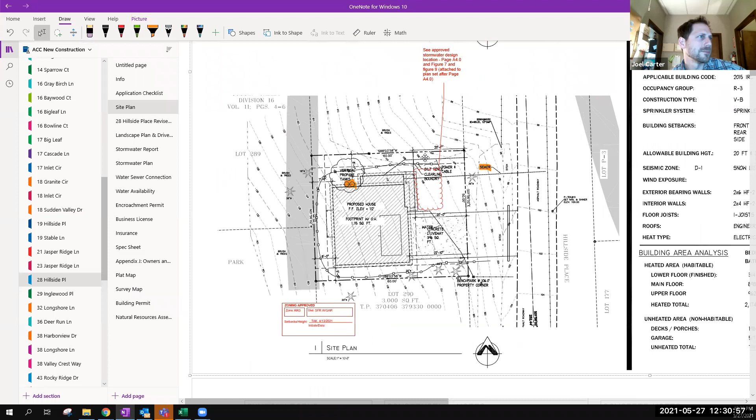Yeah, I've got 2 different versions here. Yeah, mine shows 2 different versions as well. In the same packet? On the same drawing. Yeah, they show the buried propane tank in front. Yeah, see, mine actually still shows the buried propane tank in the front off the driveway. Yeah, there, that one right there. So mine has a combination of the 2.

So these are, yeah, they've moved them on the original plan. Hang on here. You're looking at 2 site plans? Yeah, so on their original plan submittal, they had the propane tanks in the back, and now on the new one, they have it in the front listed as buried. Huh, okay, I had it backwards. I thought they had moved them to the back, but it looks like they're moving them to the front. A hell of a lot easier to fill there.

Okay, so then can we modify our comment about the tree in the front? If they're gonna bury their propane tank there, then they need to remove that tree. Okay, yeah, it has to come out. Okay, got it. So maybe we just tell them to remove the tree, I don't know.

Which may alter their stormwater calculations again. That's a big tree. And removing these trees down here as well. Yeah, definitely that one that's right up against the corner of the house. There's no way they could save that one.

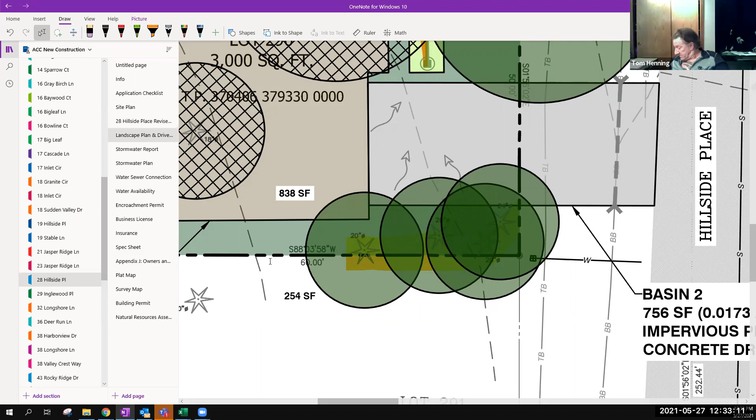All right, that's all I have for my notes on this one.

Property coverage and the cluster lot rules apply. I've got them at 37.2% for property coverage, but that doesn't apply in this case. They're at 56% open space remaining, including that northern parking area, so they get to have a quarter interest of the square footage of that parking area included in their open space coverage. Without it, they don't meet it. With it, they do.

The driveway slope is the deal killer, sounds like. Yeah, and if they resubmit, I'd like to see them pick plants - use the Lake Whatcom worksheet to create their landscaping plan rather than just punt on the landscaping plan and reference that, because it's not a landscape plan, it's just a tool.

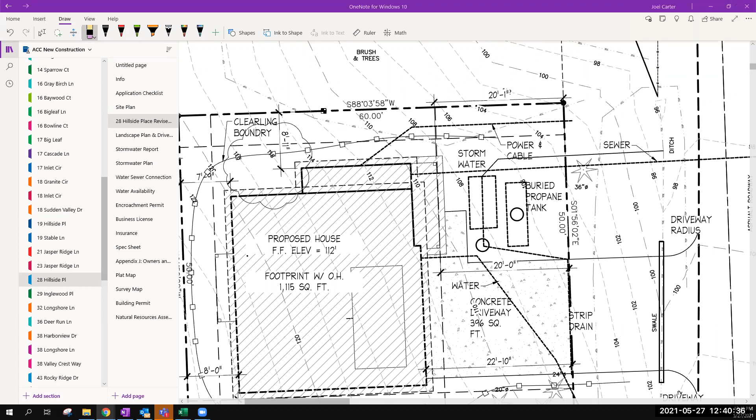Yeah, I think Keith seconded the motion, right? Yep, Keith already seconded it. So we are all in favor of denial. Aye. Say aye. Aye. Aye. Tom, did I hear you? Yes, I had my hand up and said aye. Okay, unanimous, and so that's everybody. So that passes unanimous, that denial. It is denied unanimously.

Works for me. And the primary reason is driveway slope. So do we have to include in there that the variance is denied?

Yeah, basically they're both denied because of that. Because I can't even picture what he could do to make that one work. An elevator, maybe? You'd have to have 2 of his 3 stories buried in the back, I think.

So this one being the cluster lot. Let's see, do I have the plat map here? How are they... coming in from the side? Can he come in from the side at all and make something work in there?

Yeah, so that's the idea behind this plot here, this P15, is that they can bring a common parking area here that can serve all 4 of these lots. Gotcha, so that they have a parking space. Now, I think the issue he's running into is he's got this house on his lot, which is 290 here, so big that trying to put a driveway here will violate the open space rule that he still needs to count for. And then that's going to change his stormwater and everything like that.

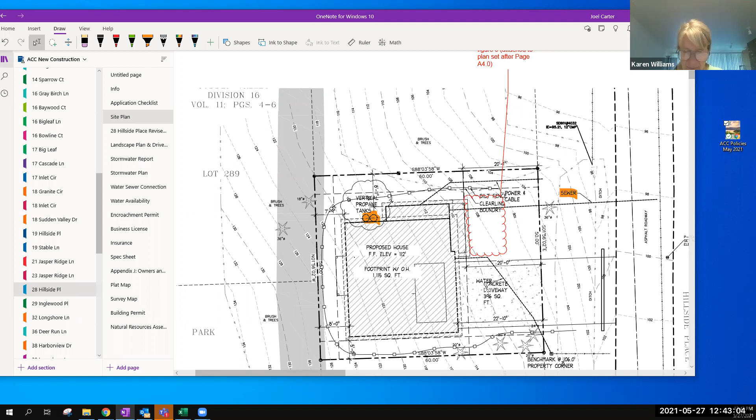And I would wonder if the lots in the back are actually Sudden Valley open space because of that. I don't know, I haven't looked. One of them shown as a park right below 289 there. Yeah, so if people own 289 and 288, I feel sorry for them. Well, they're going to have no choice but to use that P15, that common space.

Well, it's like we said, some of these lots just aren't buildable. But they're a problem. I got to send you guys, there's a stormwater report done in 1982 for Sudden Valley. Apparently originally the developer subdivided over 4,000 lots. Wow, like that one exactly. The drainage system, 4,500 lots or something like that.

And the difference between that and what we have now is partly people combining lots and partly Sudden Valley putting lots into open space. But that developer just... he had chutzpah. It was pretty lax back there in the early days.

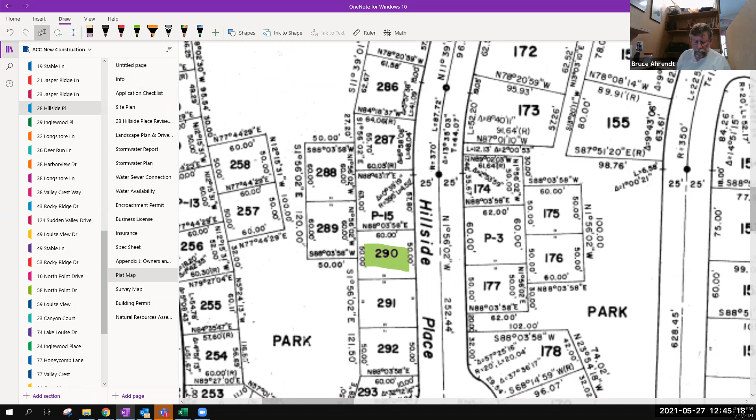Are 258 and 257 built on? 257 is green, 258 is built on. So 257 is Sudden Valley also. Common area, yeah.

They really should have picked this one up for common area too, instead of sticking it to someone to try to build on it. Yeah, there's a whole bunch like that around the valley. They made the choice to buy it. Yeah, way back when, before anybody knew any better.

Some of these... the lot in front of me, the owner is Canadian, an old Canadian gentleman. And well, the owner until a developer just bought it. Anyway, that's a good lot. I mean, it's difficult to develop, but it's right there in a very good, nice location. But he also owned another lot up on the hill that was even worse than anything we've seen, because it had a stream buffer occupying about half that steep lot, and then one of those narrow roads up on the hill where it drops off steeply right from the edge of pavement.

So for the 20-foot setback, they'd already be suspended in the air, and they'd be in the stream buffer. So basically that was this nightmare lot, and he was trying to get us to look at buying it.

I've got some neighborhood news that'll make you smile. The house 3 doors down from me went up for sale last week. It's one of the older homes, probably 2,400 square feet, needs paint, roof, gutters, some updating. They listed it for $750,000. The first offer on the first day was $820,000. It sold the first day for $70,000 over market, no crazy appraisal issues, no inspection, stay in it as long as you want, we'll take it when you move out. Oh wow, that blew me away.